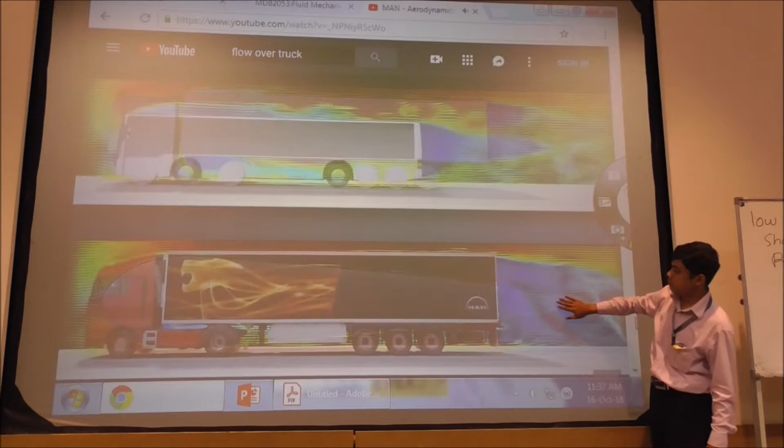The greater the front surface and the more edges the body has, the greater its air resistance. Now this is your truck. When you have this kind of truck, you have a big area of the wake, right? Separation will be like that. This one is your streamline. The air resistance: doubling the speed results in a fourfold increase in air resistance. Thus, at a speed of 80.

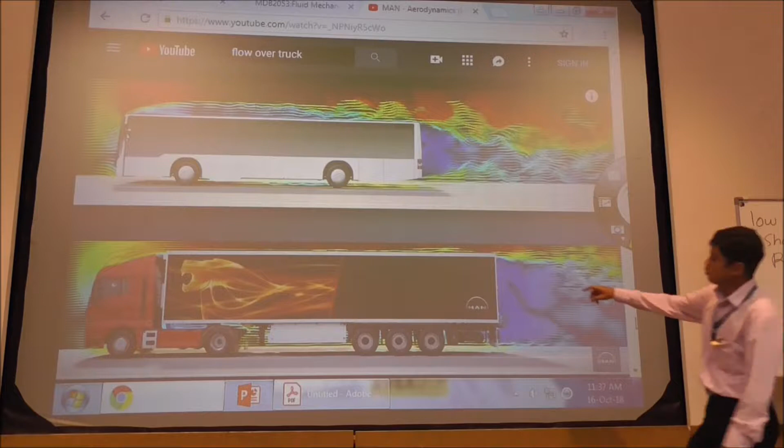Now you can see here, this is the wake. Separation. Okay? This is separation on a truck and this is separation of a bus. So you can see, because these two vehicles are bluff bodies, right? That's why the wake is as big as those.

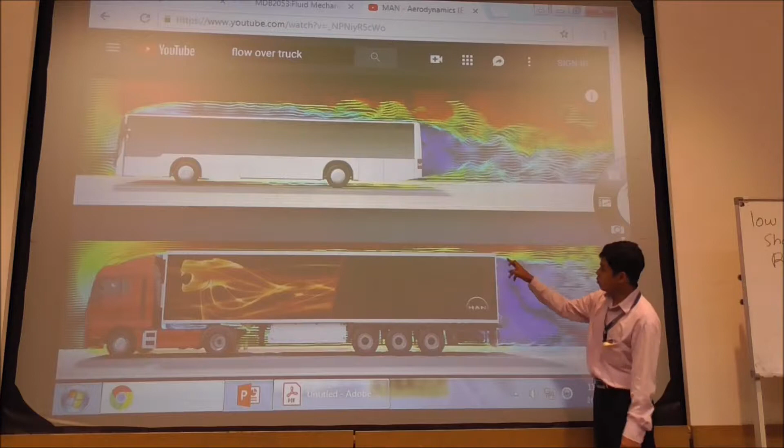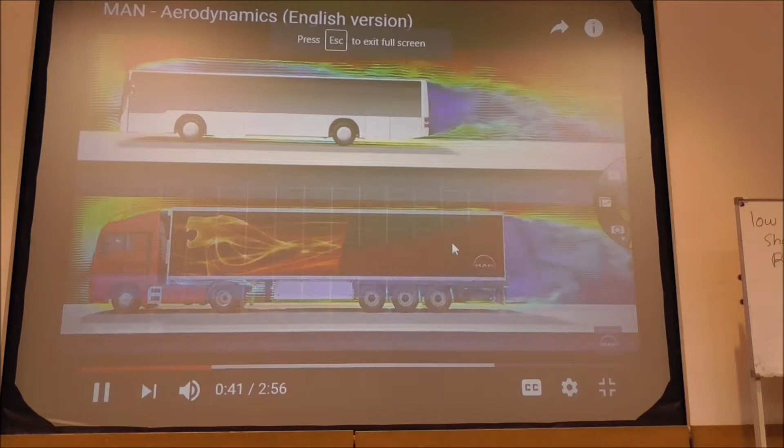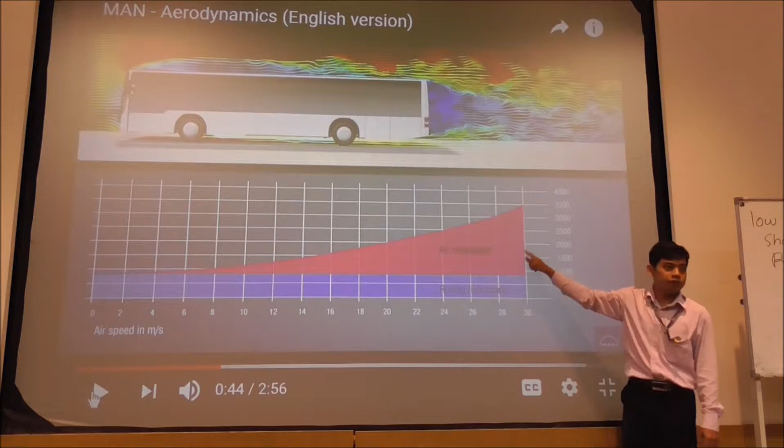Okay? 55 kilometers per hour, 40% of the overall resistance. This is your rolling resistance because of the tire, right? This is the air resistance, the drag due to the air friction. So you can imagine if you have a velocity of our highway, 110, which is around here, the drag is 4 times the rolling resistance. So it dictates how much fuel is burned by your car. Already generated through air resistance alone.

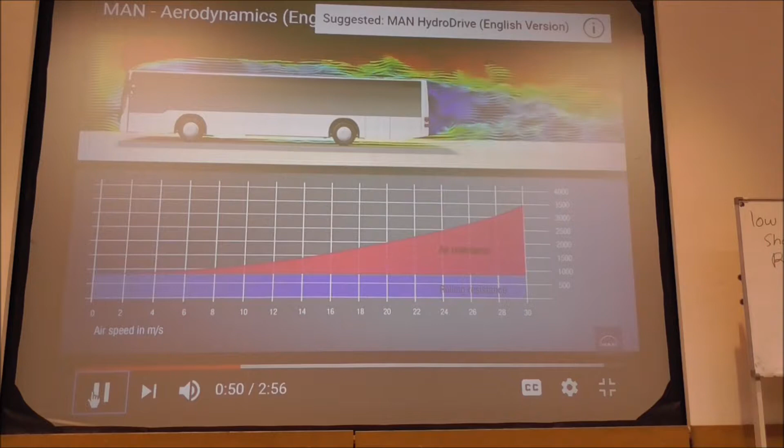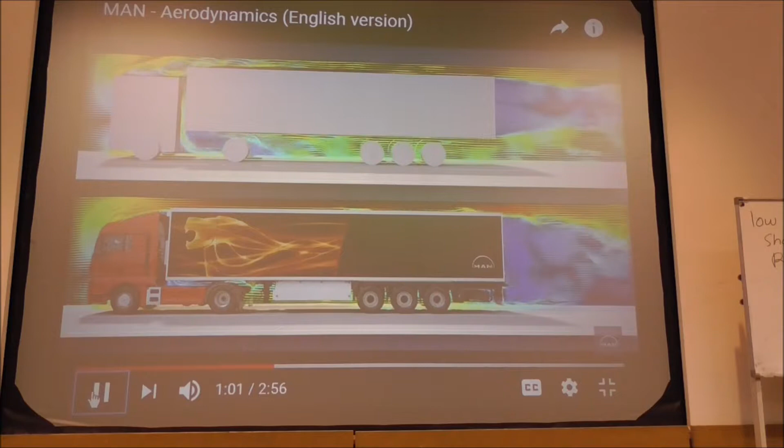Rounded edges at the front, wind deflector plates on the sides, and a roof spoiler significantly reduce the turbulence and therefore the air resistance. The aerodynamic potential that can be achieved without taking into consideration legal framework conditions is demonstrated by an example of the MAN Concept S. Nice, right? You can design a truck like this.

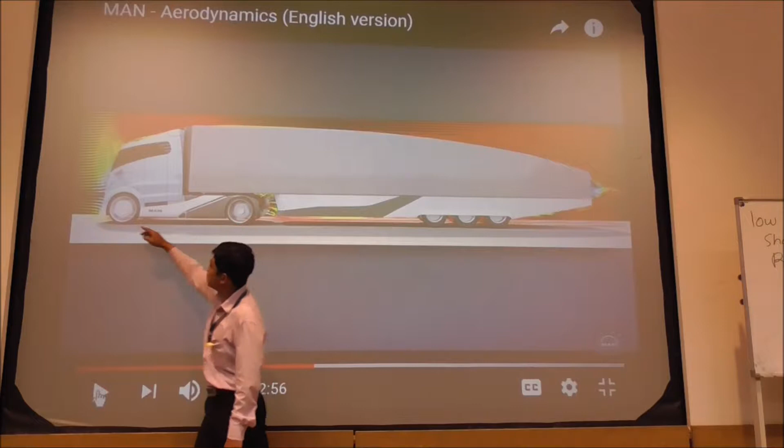So if you do this, you can see that the wake is very small and the tire is covered, so there is no wake generation in here. And over here you can see that this one is covered and the shape of those things is just like that. If you know the Tesla semi truck, yeah, it looks like that. Right?

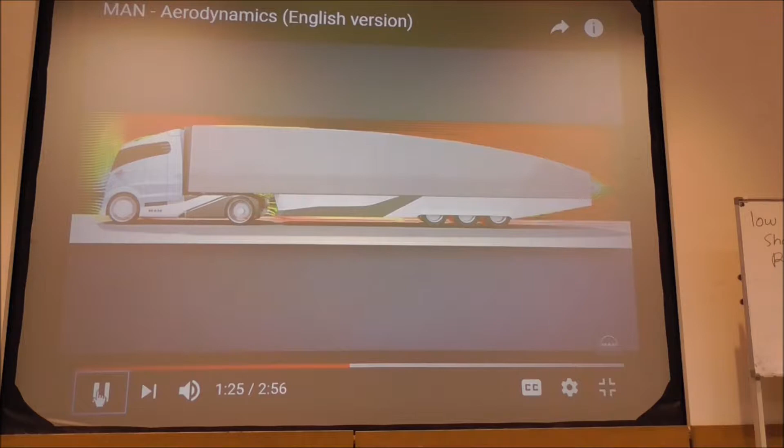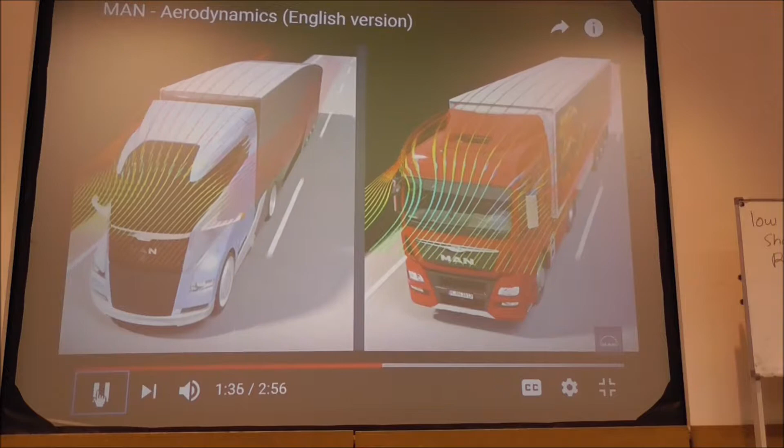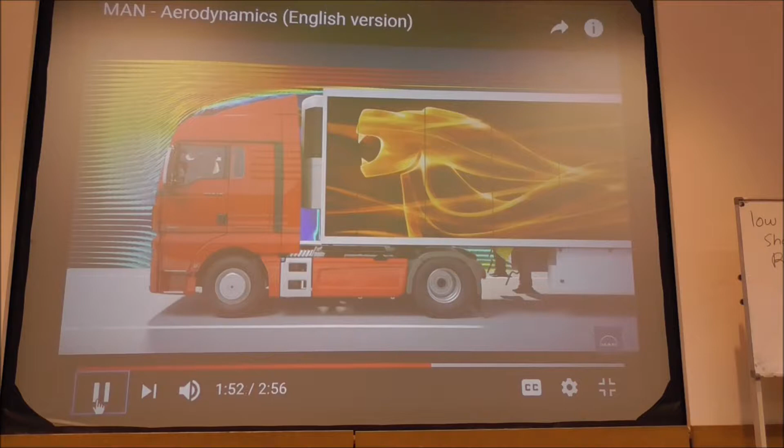The key features are adaptation of the tractor unit and semi-trailer as a single unit, the aerodynamically ideal shape, reduction of the back pressure on the front of the vehicle, extensive side and underbody paneling, protruding components are minimized. For example, the mirror is replaced by a camera. Through optimization of the cab shape, it has been possible to reduce the air resistance for the TGX by around 4% compared with the previous TGA model.

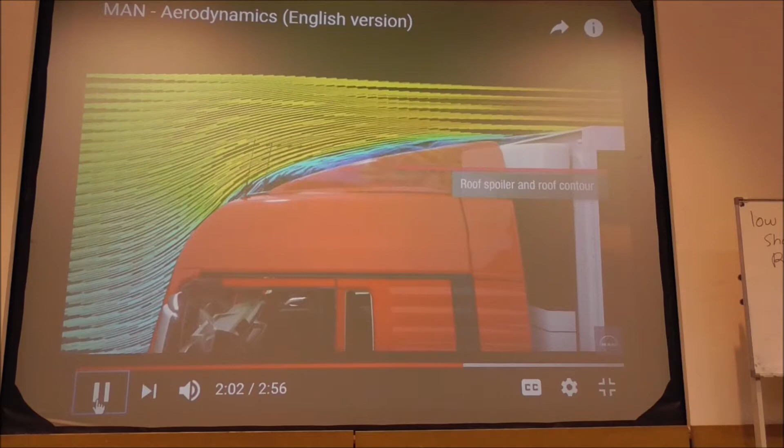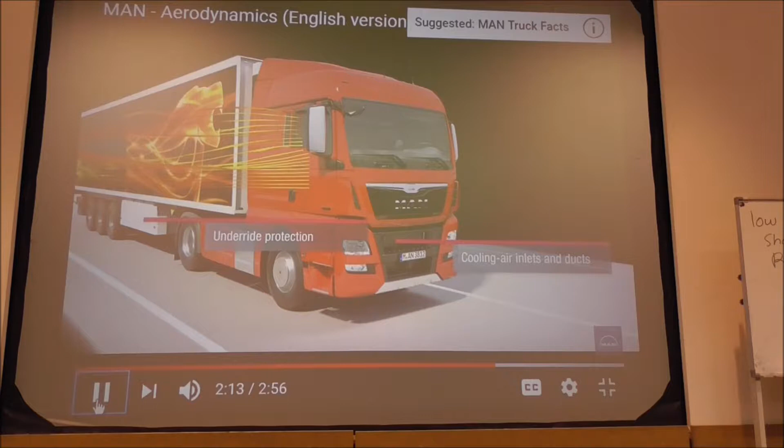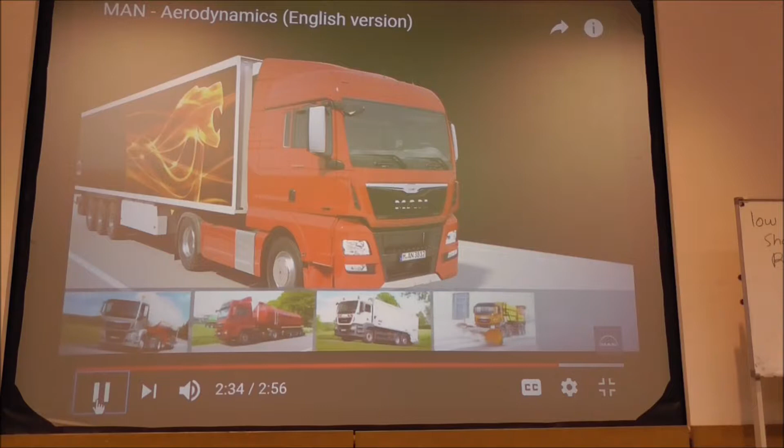The better the design and adjustment of the spoiler systems, the lower the increase in drag in this area. In the further process, the side contour of the semi-trailer and the cab front in particular offer potential for reductions. Open bodies such as tipper troughs, platform bodies with angular cargo, or fissured special bodies, for example those in car transporters, cause a high air resistance. Depending on the driven speed, this can result in increased consumption of up to 15%.

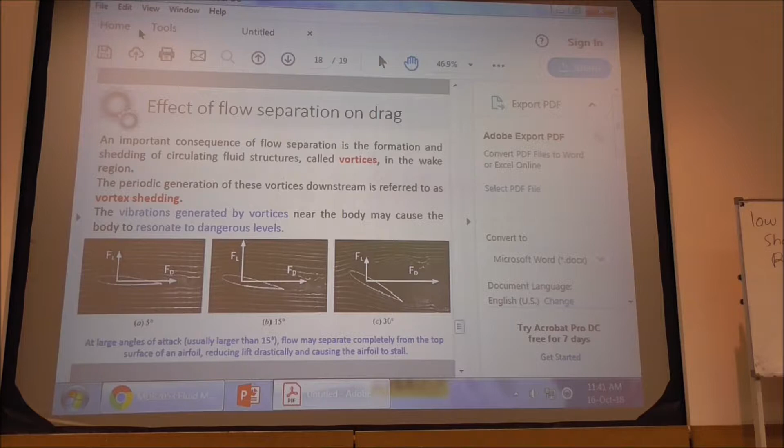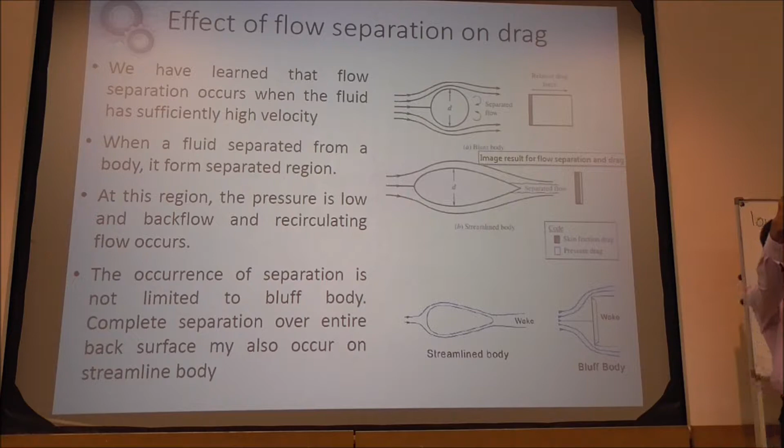Now another thing that I want to highlight to you is this: when you have a blunt body, right? When you have a blunt body, most of the drag is due to the pressure, while a little part is due to the shear. Okay, so when you have this kind of body, the drag is mostly due to the pressure difference between the front and the rear. The shear working on this side is marginal.

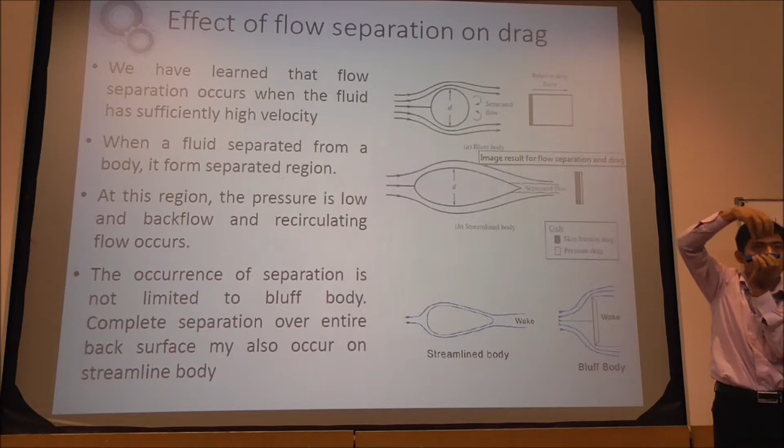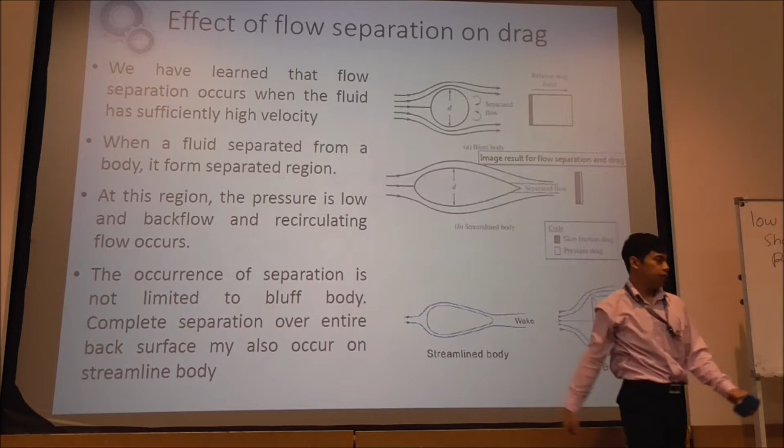Okay, but when you have a streamlined body like this, the drag due to pressure gets minimal, but the drag due to the shear stress gets more important. Right? More important. That's why later on, when we look into the aircraft, the drag coefficient is not calculated based on the frontal area, but on this area. Because when you are dealing with a streamlined body, this area is small, this area is the big one. And the drag force is mostly due to the shear. That's why the shear force gets bigger. Okay?

And then the other thing is the drag is depending also on the angle of attack of your streamlined body. If you have conducted an experiment in a wind tunnel, any one of you? The assignment asks you to evaluate the drag force or the coefficient of drag when the angle of attack is changing, positively and negatively, and you will see everything change.

I'm not sure whether the smoke generator is working on that wind tunnel. It used to be, right? When it first came, of course it works. Nowadays, no. You can have this kind of flow. This white line is smoke from the smoke generator, and that's why you get all those streamlines.

When you have a vortex here, this vortex will generate a vibration, because when you generate the vortex, the pressure here will keep changing dynamically. That's why sometimes if you are inside the aircraft, the pilot says, please fasten your seat belt, we have turbulence. That is due to this small thing. This small thing can shake the aircraft. Even though your aircraft is very strong, this small thing can shake it up.

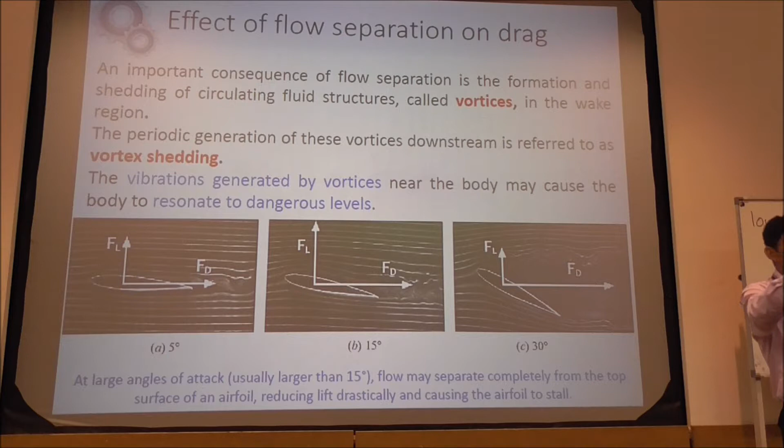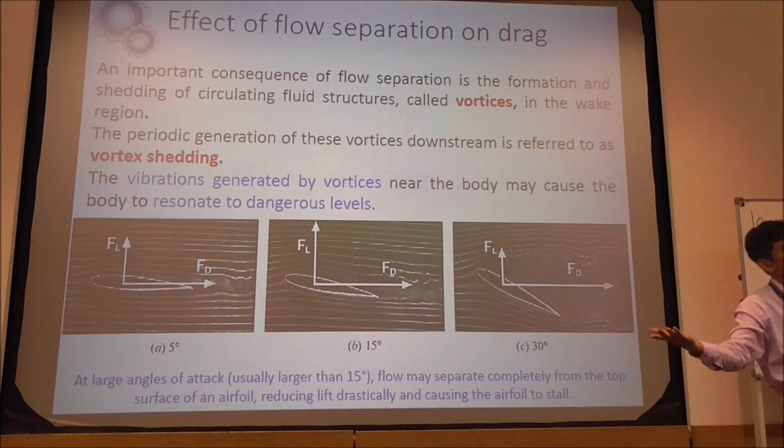Why it's happening is because of this vibration. If the frequency of those vibrations is equal to the natural frequency of the design, if you have the same frequency, like your radio, you can hear the radio because something is changing the frequency, then you get it there - FM, frequency modulation. The same goes for that. When the frequency of this vortex is the same as the frequency of your bridge, you will resonate, then it will collapse. That's why you got those problems.

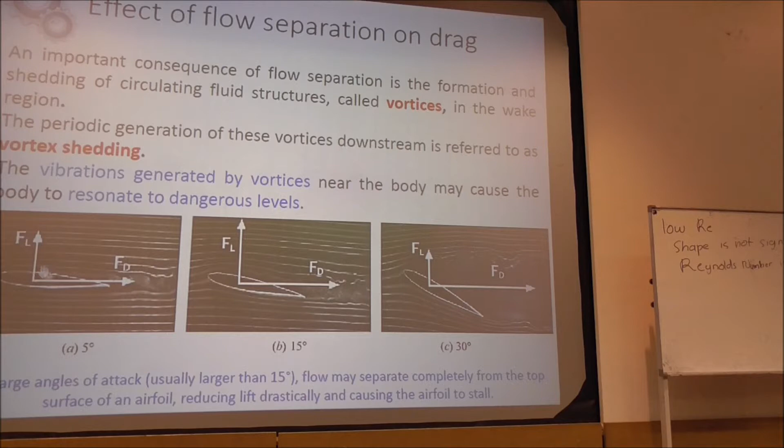And it is mostly dangerous for the aircraft because the design of the aircraft strongly depends on the aerodynamics of your wing - how you can design an aircraft wing, especially so that you can have it fly.

So for those, we will be dealing with the lift coefficient. If you look at it, everything looks exactly the same, right? Previously you have FD equal to CD, A, half rho, V squared. Now you have your FL equal to CL, A, half rho, V squared. The only difference is this.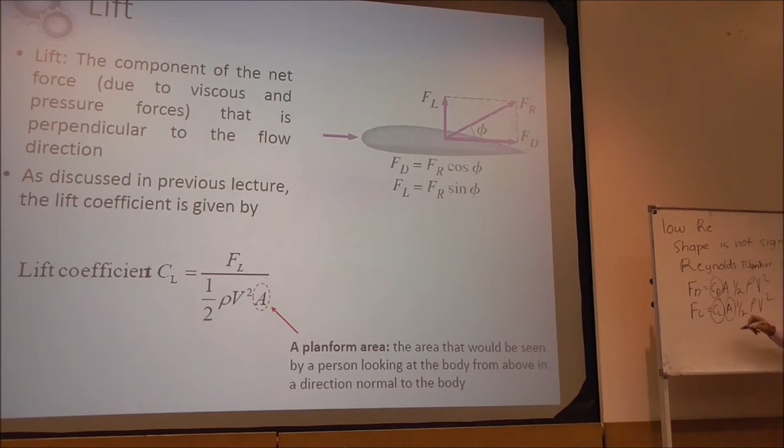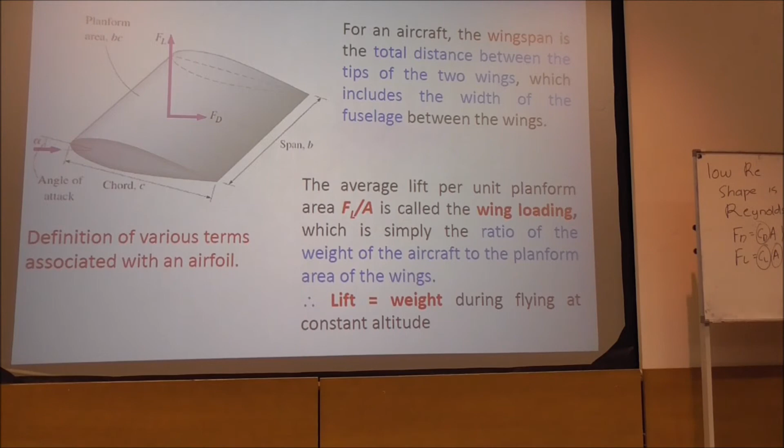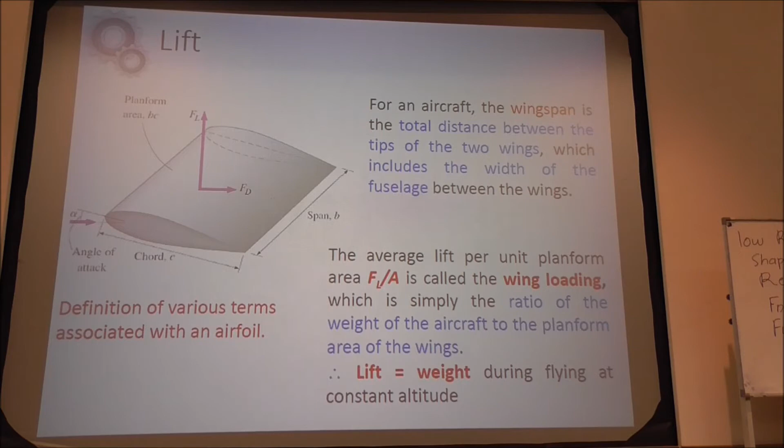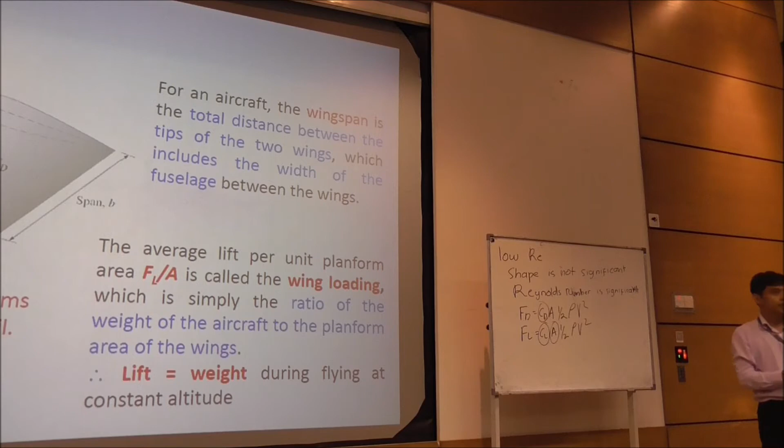The other difference is the area. For this lift, the area will be the planform area. What is planform area? It's the area of the wing when we view it from the top. Imagine this one is your aircraft, you put it there and look at it from here - this is your wing area. If you go to Wikipedia and search any aircraft, they will state clearly what is the wing area of the aircraft. Why is it important? Because the wing area will determine your takeoff weight, maximum takeoff weight, the rating of your engine, and how long the runway needs to be for your aircraft to fly.

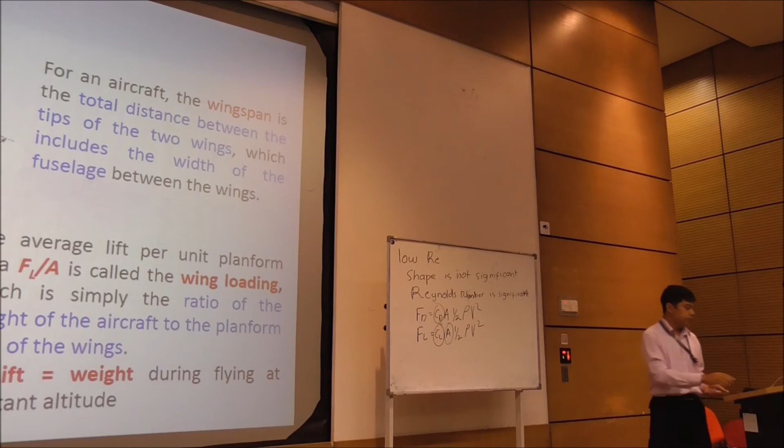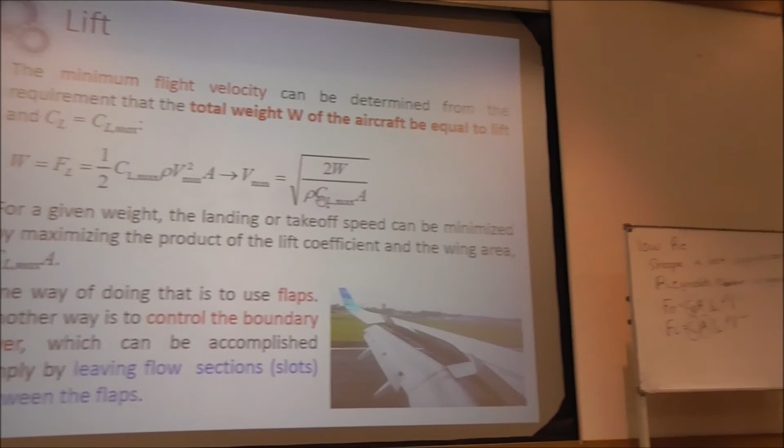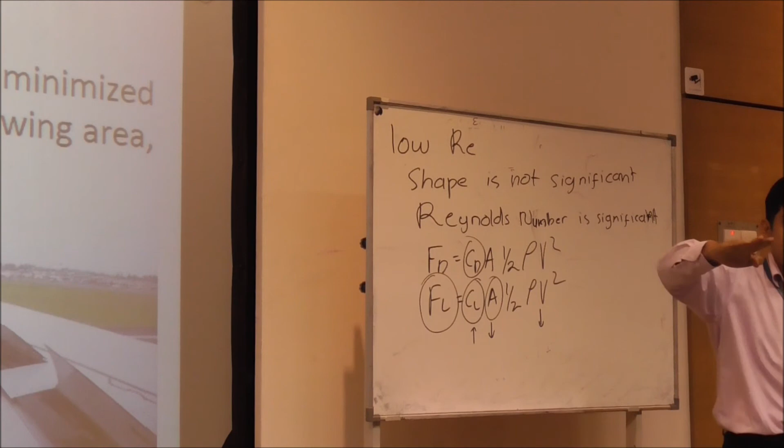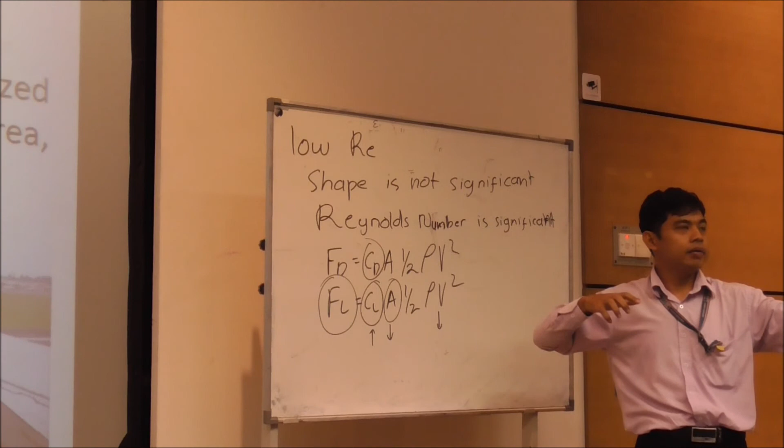Depending on that, the other thing you need to learn is CL, the lift coefficient. Why that is important is you will see that the bigger the lift, you can have a smaller area and smaller velocity to take off. Because if you want to take off, the lift force has to be equal to or higher than the weight. So before you can take off, you need a minimum velocity. If you need higher velocity, you will need a longer runway, because your aircraft starts from a stop. Before the aircraft starts to roll, it will stop, and then it starts to roll before you take off.

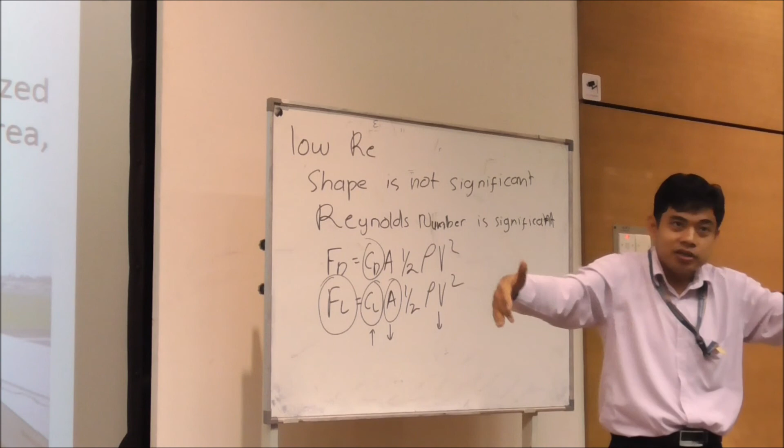And the engine of the aircraft - you cannot make it as powerful as you wish, because when you have a more powerful engine, of course you will consume more fuel. And the bigger the engine, the bigger the drag. The bigger the drag, you need more power to overcome the drag. The bigger power needed, you need a bigger engine. Now the bigger engine creates more drag, the drag needs more power to overcome it, and to get that power you install a much bigger engine. Now this becomes a problem.

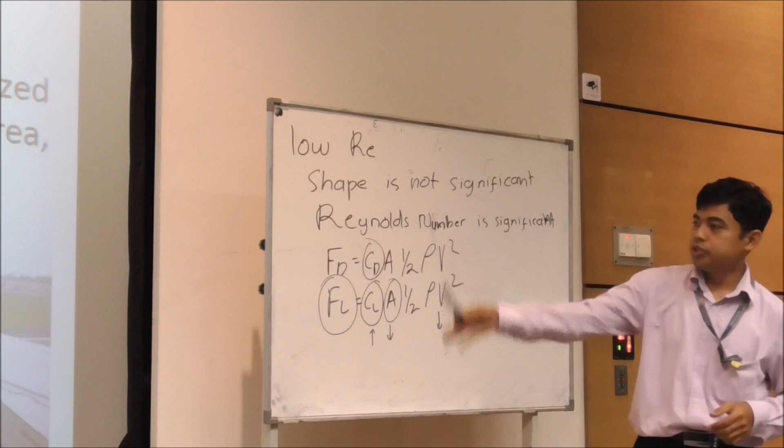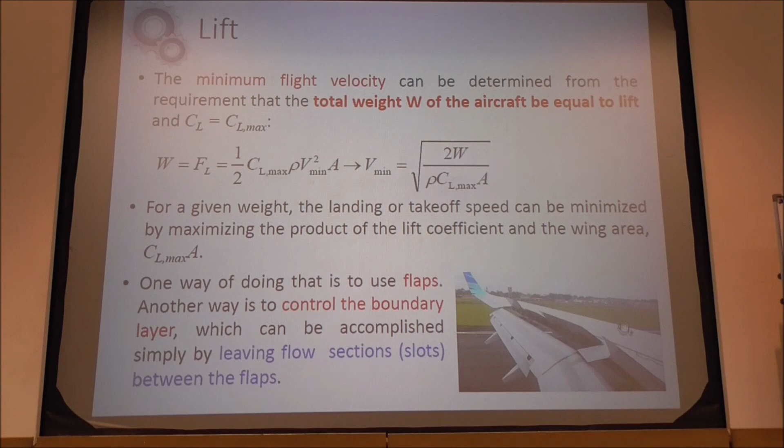That's why you need to optimize it - optimization is always there. So I will show you how we deal with it, and you will learn what the components on the wing of the aircraft are. So next time you hop on an aircraft, you will know that this one is an air brake, this one is a slot, this one is a winglet, and that one is a flap, and so on. We will learn about it in the next class.